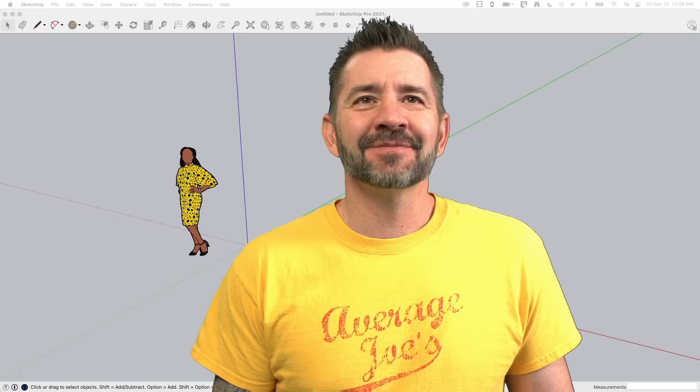Uh-oh, you covered me up. Yeah. See? Working out bugs, didn't realize I can do that. I'm gonna have to stare over to the left. That's right, you turn your head. I'm sorry, I'll try to fix that next time.

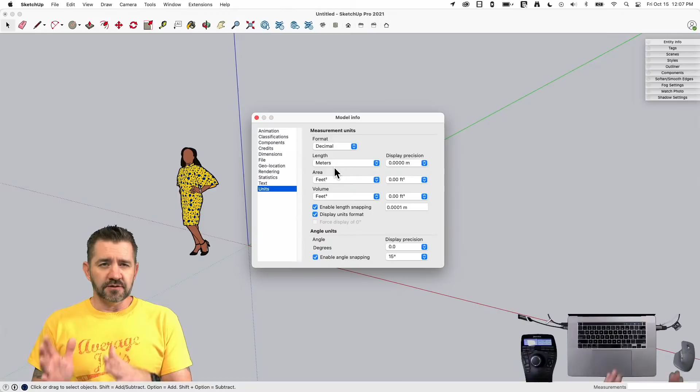All right, so here we are in SketchUp. First thing I'm going to do is go to my model info and change my units. I'm going to change from inches to meters. The drawings themselves are going to be in millimeters, which is pretty standard for something that gets machined. I'm going to model everything in meters with the millimeter value, so I don't run into the small face issue inside of SketchUp.

Just to let everybody know, SketchUp was created based on the thought that it would be used for architectural purposes, so it was never designed to work with very small faces very well. By bumping it up to meters from millimeters, we're going to use the same dimensions we see on the page, but model it, what, 100 times bigger, 1,000 times bigger?

I don't know. Why not both? We could rescale it down. 1,000 times bigger, oh how about that? That'll break things in a different direction. Too big. So that's what we're going to do, we're going to work with it like that.

Dave wants to know if he's got permission to show what he's already done. Of course, Dave, post away. Yeah, go for it. I think somebody else, Andy, was also starting to post some stuff too. He was running into some missing dimensions, which I thought was exciting. I haven't looked at the drawings that much, so I don't know what we have and what we don't have.

I'm looking at these drawings and I can't help but think part number 4 is basically just the SketchUp logo. Isn't that funny? So we're going to start with this one, part number 1. There is no significance to these numbers or values, I just put names on them in the order I thought would be good for a warm up, and we'd work our way up. That's everything going on here, so don't look for any more meaning than that.

Okay, so here we have it, this is the thing. I imported this as an image, threw it on the ground, and did not scale it. I'm not looking to actually trace and draw these things to scale. The whole point of this practice is to use these dimensions to make these drawings. So I'm intentionally not scaling it, this is probably not 54 meters. Let's see, no, it's 1.4. Ooh, this is a little too big.

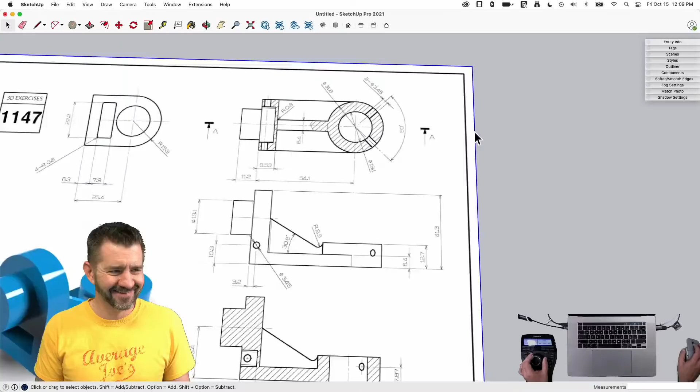Dave and Andy both said they can barely hear me. I don't know if I turned my face away, but if there's knobs, let me turn them. Yeah, turn that knob, the one with the green cable. Turn that one to the right some more. 11? Is 11 okay? Let's see how it goes. You might just have to get up on it and get more friendly with it. Come on up in here, because somebody was using it right.

All right, we're going to hop in here and start drawing this thing. As I'm looking at this, I'm thinking this would actually be a great way for people, if you happen to be in the beta for the iPad version, to start practicing your iPad version of SketchUp.

Absolutely, I'm going to switch this over to millimeters and try to model it and see what happens, see if we're closer this way. Learning opportunity.

So it's going to be way smaller now. Where's 54 at? Oh geez, 54 is going to be teeny. Oh boy, just have to really, really get on there. Typing a lot. All right, so, yeah, I'm trying to figure out how we'd bring this back down to a more realistic size, and then we'll try to draw on top of that. We'll play with dimensions as we go through here, and if we need to make changes, we'll make changes.

All right, so right here I'm going to start by drawing the footprint of this piece, and then we'll come up. So this piece is, what's the overall width of this right here? This would be the one dimension I don't have, right? Okay, but we have this. Am I just not seeing it?

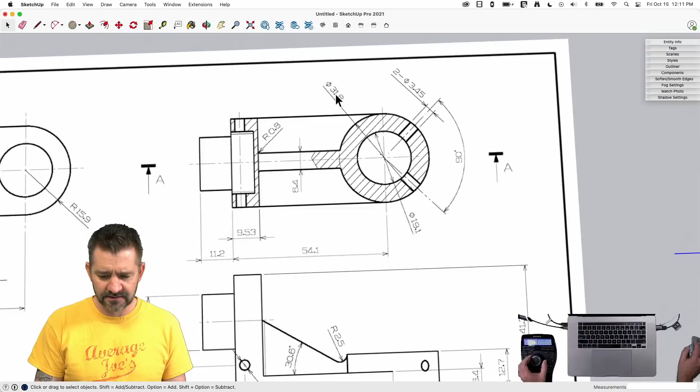All right, so I know that this dimension right here is 54.1, so that's the first piece, that's this line right here. Then we go up. Oh, here we go, here's a radius of 31. Is this a radius? No, it's a diameter, so it's 31.8. That'll get us our original 31, or initial rectangle.

And I know I didn't use the rectangle tool. I think it's because my brain accepts those dimensions one piece at a time, so it's easier for me to do it that way. I know some people want to know why I don't use the rectangle tool right off - it's just habit, I guess.

All right, I'm gonna draw a circle. I'm gonna use 24 sides for all of my circles, and I'm gonna start at the center of this line, pull up to here. That was a different center. Yeah, that first one was not right. There we go. All right, so then I have that.

Now, since this hole goes all the way through, I'm going to put this as part of my footprint. I'm going to come in here with a circle, grab the middle, and pull that out the same direction on the red axis. See, I'm going the same direction as I pulled out. Well, actually, the first one I pulled out green. It'll be the same. And that is... see that it's posted - it just shows you the thickness of the wall.

So right here, 19.1, is it? Oh yeah, and here's our math shortcut for those who are like me. I can type 19.1 halves - no wait, that won't work. I'm gonna have to do math.

Yeah, that was one of the first things Dave said, was there's going to be lots of math in today. Dang it, how can I cheat this? Hold on, no I can't. Okay, here's what I'm gonna do. I'm gonna draw a line right here that is 19.1. I'm gonna grab that line, move it middle point to a middle point, and then draw a circle up.

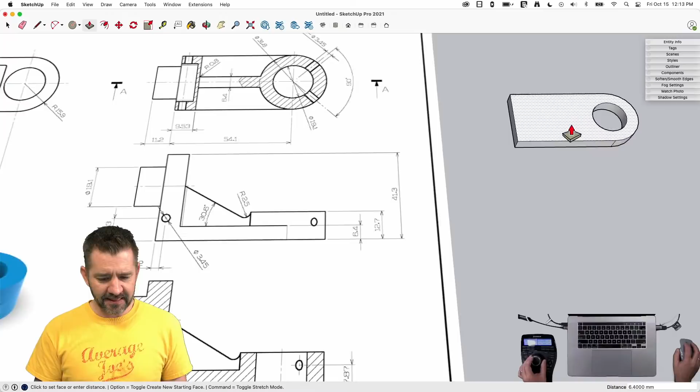Yes, inferencing mathed. All right, I'm gonna pull that up right here, 6.4, 6.4. And then this circle goes up 12.7. So I'm gonna, a couple ways I could do this.

I could come in with a circle, go to the middle point right here, pull that up. You forgot to turn on your screen, your keylogger. Oh nuts, let's see if I can - shortcut key sometimes works. There we go, boom. So that would be an option.

The other thing I could do is grab this arc and inference to the center here, and option copy that around 180 degrees. That works as well. All right, then that needs to go up.

More mathing here. I'm just going to draw a line, come over here like this. Maybe this is my goal today, is to not do any math. 12.7, and then I can just inference that up to that point, and then option smooth that line. That gets me this piece. So now I have this.

This part right here is going to come up, and I can use this right here - this is a good spot to see that. So this comes up to the center of the circle is 25.4, so I'm going to start right here. 25.4, that's the height. The thickness is right here, 9.53.

So I'm just going to grab this line right here and move it - option 9.53. That's, of course, the Mac shortcut for copy. On Windows, it would be Control.

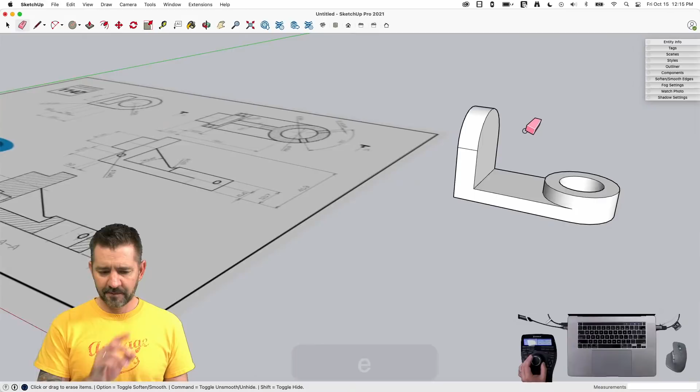So Bill points out that if you're modeling it 10 times, you wouldn't have to worry about that decimal. Right? Yeah, but I would screw that up. Sometimes it wouldn't be, no question about it. I'd be redoing dimensions constantly because I would forget.

So yeah, doing one-to-one, not gonna worry about it. All right, so I'm gonna come over here, and this is nice enough to have a radius, so I can just type in this 15.9. Oh, that's the outer. Oops, son of a gun.

I don't know that that's... oh, right here. 19.1. Sounds familiar, deja vu all over again. Here, just undo it. Wonder if I can get tricky right here. Let's do this, this would be fun.

I'm going to copy this, rotate it, grab it by the center, move that center to this center, and then pull that out. All inferencing all the time, boom, like there's no tomorrow. 11.2, didn't even have to draw anything for that one.

It's sort of like a Lego kit, you just kind of grab pieces and stick them together. That's right, less thinking, more doing. That's how I like to do it. That's my precision modeling tactic, just don't think so much.

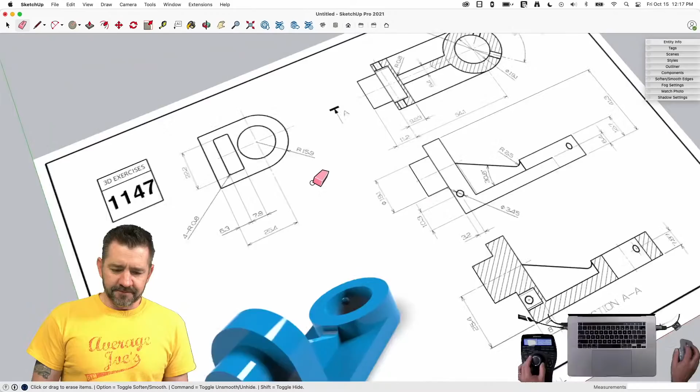All right, we have a little hole right here, so there's this 22.2 by 7.9 opening. So let's do this. Let's take this line 6.3 up. So I'm going to grab this option, move that vertically, 6.3, enter, and then it is 7.9 tall.

Whoa! Move that up, 7.9, and then it is 22.2 wide. So that means if I come to the very center, I'm going this way, 11.1. Sorry, I did that math in my head. I just had to show you that I can do that, especially when it's very even numbers like 2 divided by 2, I can nail that all day long.

Oh, that's coming, I'm sure. All right, so I'm going to grab those, and then that pushes in not all the way through, but 8. So grab that, push it in 8, and then delete that line.

So work on this piece is coming along. I got a couple holes in here, some down here, and some into the circle. We'll do that with solid tools, it's the easiest way. This hole right here is easy enough to punch through, we could do that one now. This one where I have holes coming into a rounded surface is definitely going to be easier with solid tools. Using solid tools means getting this to a solid state and making it a group first, and then coming in and putting the holes in.

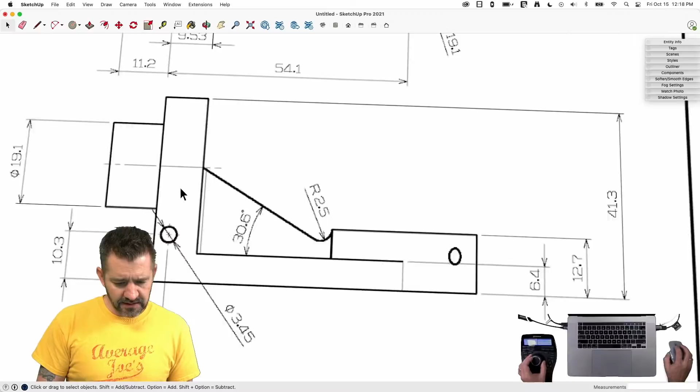The one thing I'm not 100% sure about right here is this guy. So it looks like he's at the center, or she, they are at this - I'm not gonna be able to say it. Go pull that up to the middle of this circle. Actually, I guess I could pull it up, oh, I just pull it up to here, right wherever this line ends. That's the same height as the center of this, which it looks like is where that's supposed to be. And then, see, it has a rotation of 30.6 from the flat.

So here's what I will do for that. Actually, I probably wouldn't even do it there, I'd probably go like this. Draw it right here, grab that, rotate it, 30.6, and I'm going to grab that and drop it right here. Now I can just take that line, continue it all the way, just run it right through. All right, there we go.

So that is kind of what we're doing. Actually, I'm going to drop that down, get me a plane right there. All right, so that is not done though, because we do have a 2.5 radius arc right here. So maybe I'll go like this to give myself a work surface there, and then I can draw an arc here to here, then pull it down.

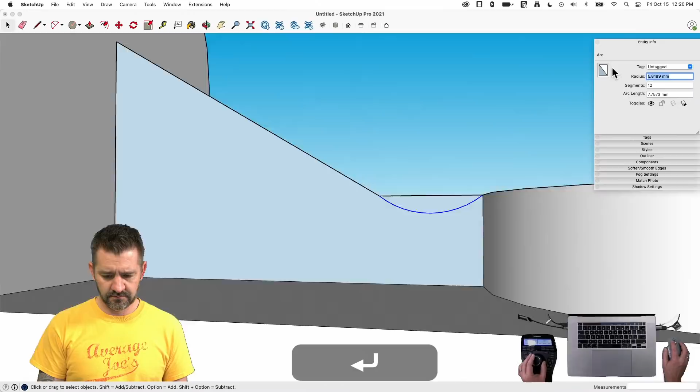How would I do this? So it's a 5 diameter. So if I just draw it, then select it, and then come here and say 2 point. It didn't work. 2.5. It didn't like that.

Make a copy. 2.5, I will come at you. All right, what? All right, let me put this back. So, like, I would probably make a... I feel like something's not right. A 5mm circle, okay, just sort of - all right, let's do that.

Wedge it in again, so we'll make that, take that, option, copy it over here. Something like that, doesn't quite meet up, but it gets us close. So if that was correct, then we could do some erasing, and it would get something like that. Doesn't look right. Dave's probably telling me in the chat why I'm doing this wrong.

No, but Andy did say he had fun with this part. Okay, well, hey, that does not - I would consider that fun. No, it's not too far off.

All right, so the width of this is 6.4. So I'm going to go ahead and grab it here, 3.2. And then did that get you? Oh, whoa, here it is. There's a thing. All right, just when you thought you were just about done, pump the brakes, buddy.

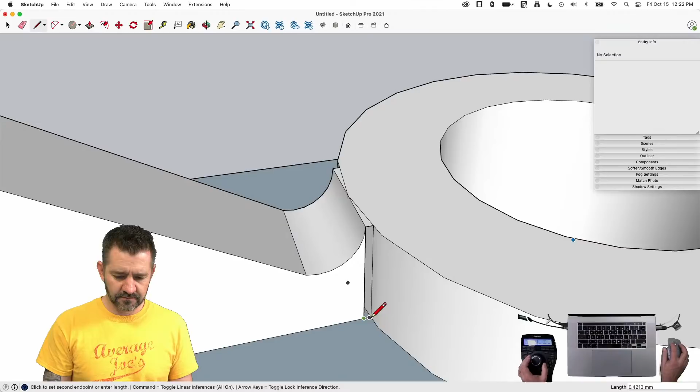So there's two ways this could meet up, obviously. This arc could actually eat into the circle, right? So this could - I have it meeting here at the tip, but it could meet in at the edges, which would give me a little bit more of a swing down here. And that might be why - might be why I feel a little off today.

Let's see, what does this look like from the top? Yeah, see, this goes all the way through. So that arc actually goes to right here and not... oh, tricky, tricky, tricky. All right, I'm going to go ahead and go like that. Delete this.

I'm going to make this a group, and I will pull that back to here, and then I will explode it. I made it a group because SketchUp is always going to try to keep geometry connected. So if I moved it without making a group, it would have stretched everything over. By making it a group, I temporarily isolate the geometry and then pull it over.

And then I should... let's see.

They said this method would be harder to machine.

Yeah, but some commenter who I won't mention already told me I do a bad job at that. So you're just leaning into your flaws. I'm going to do it as wrong as possible. That's right, I'll show you poor quality. No, I'm just kidding, no you won't. That's right, all right, yeah.

So that probably would have made more sense to go back and do that a little differently. But hey, we're matching the drawing more or less, so I got that going on. All right.

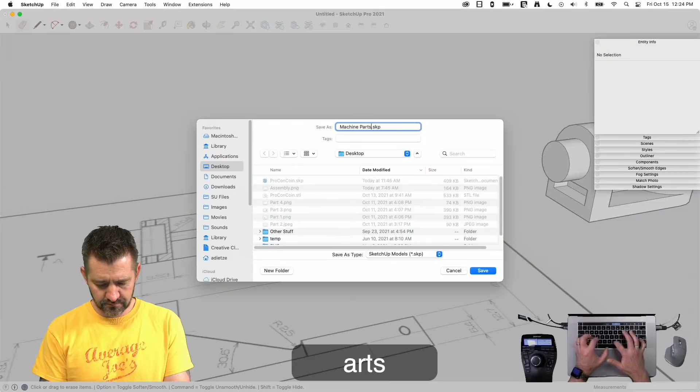I have other jobs called machine parts, I'm sure, so threw a date on there.

All right, last bit is going to be some holes. These holes, like I said, are simple, right? Because we got a 3.2 in, 10.3 up. So if I go... or I forgot the number they said, 3.2.

Not only does he suck at math, he also can't remember a number for 10 seconds. Up 10.3.

Actually, I think it has more to do with self-doubt than anything else. I'm worried that I'm mixing up a number. There's a lot of numbers here.

All right, so I have an outer diameter of 3.45. So if I didn't want to do math, again, I come here, 3.45, grab that right there.

Get rid of these extra lines. And then what I'll do here is I'll pull it not just to here, but I'm going to pull it all the way through like this. See, that gives me a hole through both sides, but it doesn't break the interior wall here.

So if I grab this right here, I say intersect face with model, that'll break it right there. I can grab this tube and delete it, and then get rid of this and get rid of this. All right, so that's that piece done.

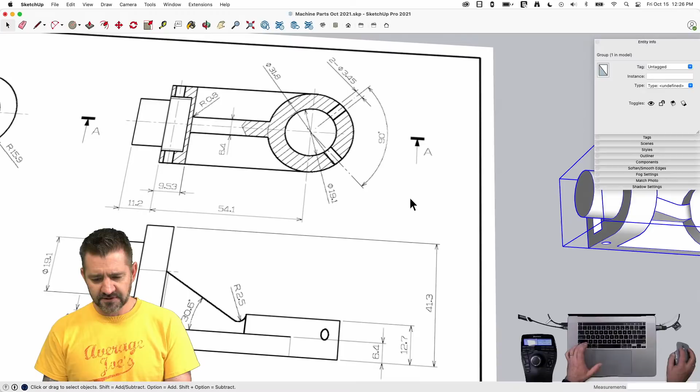3.45. Andy pointed out that little notch that plugs into the end beneath the round peg, it's got rounded corners. You can kind of see it when you're looking from the top down too. Oh, is that what that is? Oh yeah, look at that. 0.8 radius, all right, we will add that.

I'm going to grab this, make it a group, rotate it like this. Now I'm going to grab it by that center point, very intentional, and I'm going to line it with there's a center point, and now I'm going to move it back.

All right, so that puts the middle point of this circle in the middle of this circle here. Now I got to drop it down because it is 7.87 off the bottom, so I'll just come over here and 7.87, and move this from, again, the center of the circle vertically to right there.

Now they are, so off the center, 90 degrees apart, 45 this way, 45 this way. So I'll take this one and I will, again, off the center, rotate this 45 -- arrow shortcut, super handy there. Oh yes, and then this will go this way, option copy, 90 degrees.

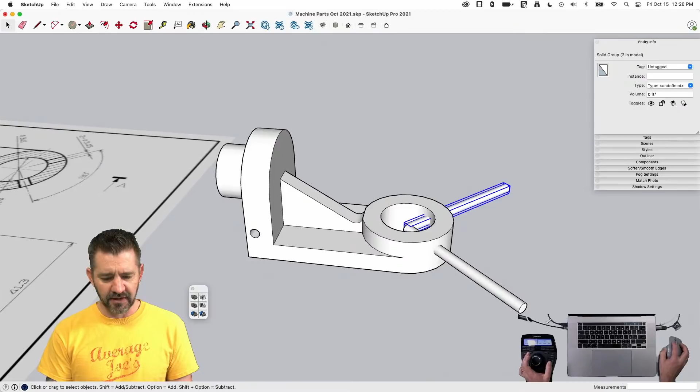And there's my two solids to subtract. So now I just go into solid tools, which is probably a tool set I should just keep on because I tend to use it a lot with machine parts. I'll select it and I'm going to subtract from -- oops, this guy's not solid for some reason.

Let's run solid inspector. I know I'm cheating, I am actually using an extension, but it's a free extension that everybody should have on their machines, and it's part of web, so is it really an extension anymore? All right, so take this, subtract that from here, and take this and subtract that from here.

Dave said he did the same process, but he did the drill holes -- the drill bits, I guess -- made them in place. I wonder how much more frustrating that'd be.

Or less. Also, everybody's asking about guidelines. Yeah, I've heard of those, seen them around. I'm terrible at using guides, I just don't ever use it, I just use geometry, I don't know. There's this thing in my brain that tells me it's an extra step, so I don't do it. Yeah, because what you did was so efficient with no extra steps.

I think I say that jokingly. Obviously, they're great tools to have. I just don't ever use them. No, I don't ever.

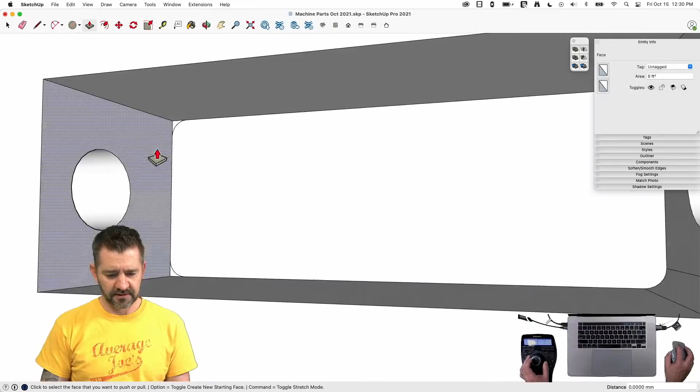What's up now? Can't talk and think. There we go, get that one in, and then I can double click. Double click, double click, oop, missed it. And then I can just do a quick push pull to pull that out. Double click, double click, and then some cleanup, a little erasing. And then what I probably would do is just do a triple click to select everything, and then soften and smooth to get rid of any extra lines. And that would be part one.

All right, I feel warm. That was 20 minutes, it's a little longer than I wanted it to be, but...

Let's go ahead and scoot you over, you go hang out by Sumele's foot. All right, I'm going to save, and I got to keep blasting through. I want to get to that assembly, the last one I have is an assembly, so I want to make sure that we get to that one.

So let's see, part number 2 is right here. All right, this is the one that Andy was saying he thinks is missing some dimensions. I say he's thinks, I believe it. I'm not saying that you're wrong, Andy, but I think we can work it out if we work together as a team. Right now, what we're going to do is actually find that missing dimension. That's right, or not find it, because it's not there. They said I'm still really hard to hear, so I'm thinking this microphone must not be...

It is our podcasting mic, so you really have to get up and actually touch your face to it. It's clean-ish. I don't know if I believe you. I don't know. That's fair, I'll try it. All right, give it a shot.

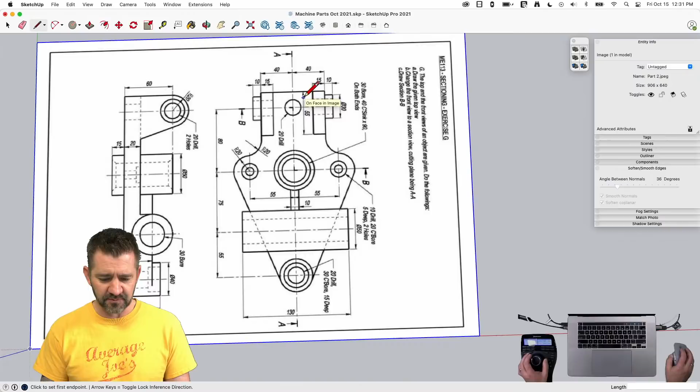Oh, is the dimension that's missing this one here on the end? I'm trying to find an overall dimension for this. This is a half, so I think my mindset would be to model half of it because all these pieces repeat on both sides, so I'll probably model half of it. So I think you should be able to use the radius of that outermost curve to figure out the overall length.

Right, so that'll work this one. But what about here, on the other side? Oh no, look to the left, move your cursor to the left. Yeah, there, here, how about that? You got 3 different marks there.

With radiuses, so hold on. So first I got this line, it's 80, right? Start with 80, that's the first piece, that's right there. I got another one coming down here, 75. And I got another one, 55. So that's these 3 dimensions. This...

Why they got to be rude like that? Okay, here we go, 40. So it's a 20, right? Half of that is 20. I just want to celebrate the fact that these are all whole numbers.

There's no decimal points, how rude was that for a sample drawing? That was not a real thing, why the hell did I put that? Thanks for pointing that out, now I'm irritated. This is radius of 20, so another 20. So in theory, this is now the full dimension.

So if I go like this, and like this dimension, that... 250 millimeters. You guys who did this before can tell me if that was right. And see, I did that without doing math. I'm just saying, got away with it.

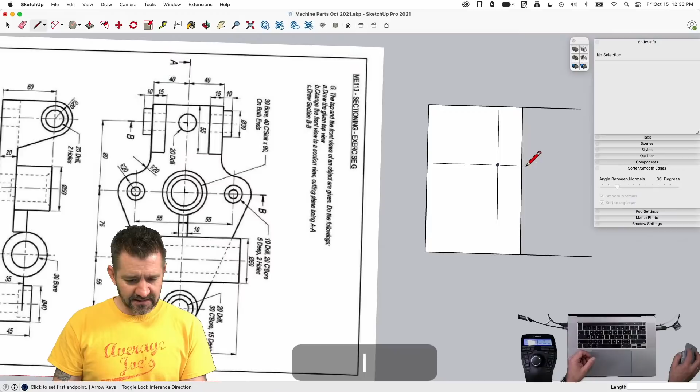Guides, in the business. So I'm going to take this line, which is right there. This comes over 55. And then I'm going to put a circle where that is, right there.

So my outer diameter is 20. I'm going to go this way, 20, enter. All right, so that gives me that, and then I have a radius of 20 here, which should just be an arc, because this is a 20 radius also, that's a 20 radius from here up to here. Awesome, so that gets me all of that.

All right, now down here, this guy right here is 40 also, so up 20, that's this line right here. I can just do a circle, pull that down like that. It gets me to that.

And then this is where I have a tangent line going from here to here. True tangents are tricky in SketchUp because you have to use an extension to figure true tangents. So I am totally cutting the corner on this, no pun intended, and that is only part of it. That's not ideal, I admit, but it gets me that piece. There is, I think it's called true tangent extension, that will figure that out for you, but I am not using that.

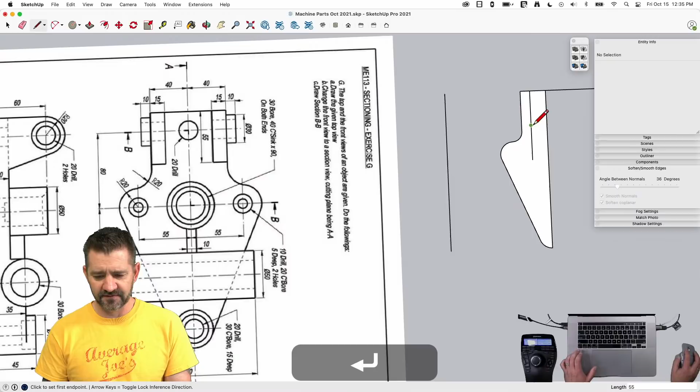All right, I'm going to put this little riser right here. If I come here, go this way 15, drag that down like that, and then come here, come down 55. I guess I could have drawn that down 55 instead of running it long. I got excited.

Especially since you're so precise with your not wasting steps. I also should have done that first as well. Let me do a little cleanup here.

All right, now this piece right here, so that's, I just pulled that up 20. This to the circle is 60, so that's another 40. Pull that up, 40. Let me get rid of some lines here.

Is it part number 2 or part number 4? You jumped ahead, that's okay. Yeah, carry on, like I said those numbers are just the order in which I downloaded them.

So, all right, so this is a radius of 20 as well. I'm going to go ahead and grab a circle, put this in the middle, and pull it out 20. It doesn't go all the way through.

And then I'm going to take it and scoot it over to here because this, maybe this. There we go, I like that better. That is where that is. There we go. Boom. That gives us that leg.

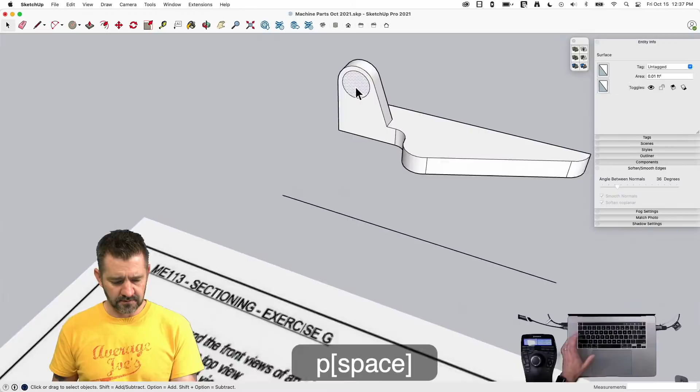There we go. Max is curious if there's a reason for your default number of segments. 24 is evenly divisible by 2, 3, 4, and 6, so I'd imagine something like that. I don't know, that's been that way since well before I used SketchUp, so I can't really say what the reason is, but it doesn't get too heavy. That's like 60 would get you there as well, right? Yeah, it's a nice light number compared to a lot of times.

So when I just model stuff for modeling in SketchUp, I use 24 for that reason specifically because it's real easy to divide - you can draw a clock using it because it's evenly divisible by 12 even. If I'm going to go bigger, like 3D printing something, I'll usually go to 96, and 96 is also in that evenly divisible range. I don't know what you'd call that, but yeah.

I'm going to take a quick break and smooth some things. Oh, yeah.

All right, so that gets me to here. I have a couple more pieces, so I'm not going to put the circles in the middle yet. I'll put the circles in the middle after we join the whole thing together, the two halves. But I'll put this circle in here, and then I'll put this chunk right up here on there, and then we'll join it together, and then I'll come back in and drop my middle circles in.

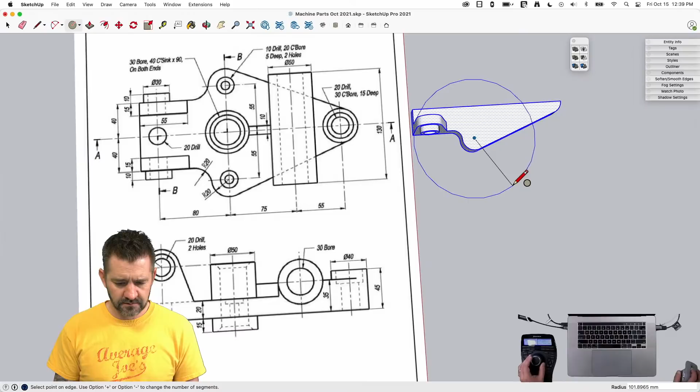All right, so question now is, okay, so I can inference the center, perfect. So I'll grab a circle right here. Oh, these are counterbored, these circles are - here we go.

10 drill, so go 10. And then it looks like it's telling me to go 5 deep. And then another circle from the center of that, which is 10, which goes all the way through. And speaking of inferencing, I inferred all that - I don't know what these words actually mean. I got a big circle, a smaller circle, one drops down. So that's what I got out of that. So forgive me if I'm incorrect.

All right, now we got this thing happening. So I'm going to create this original geometry, actually not from the outside like it's showing, but I'm going to model it from this side because I have this nice flat face to work off of. So that's what I'm going to do.

So this is 55 off of the center point of this arc. So if I come here, come this way, 55 gets me there. Drop a line to reference that. And that point is 35 off of the ground. So down here, go up 35. And they're at that circle.

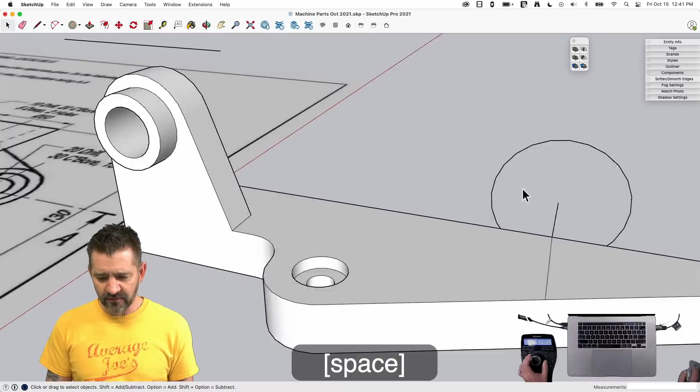All right, so now this is what I was talking about when I was talking about using a circle with those edges. As long as I draw on the axes, so as I drew that vertical, as long as I'm on the red, green, or blue axes, then I know that I have a point right here that I can drop down, a point right here that I can drop down. Not sure why it's not closing. Let's just force that. And that gives me that face like that, which is what I got right here.

Now so that is going to come across. I wonder how that's supposed to - oh no, so it'll go like this. So I'm going to take this out. Actually, I'm just going to run it long right now. We're going to come back and trim that back in a second. From here forward, this comes up to here. See that right there? It goes up high. So just pull that up now.

And then let's get this full circle on here. For this side, again, find the center. I'll just pull it straight up. There we go. And I'm just going to, for right now, I'm going to push this back to where it meets there. Push that back as far as it can go. And then we'll also have to pull this back to, I'm running it right through there. That's good stuff. That'll work.

All right, so I kind of created a little bit of a mess right here. You see, I got stuff overlapping here. I got these pieces jutting out. A little messy. So we're going to clean that up. I'll start by selecting this, saying Intersect Face with Model. That'll give me an edge right there. Go ahead and clean these guys up too. Actually, I guess I delete that one and just clean up that one.

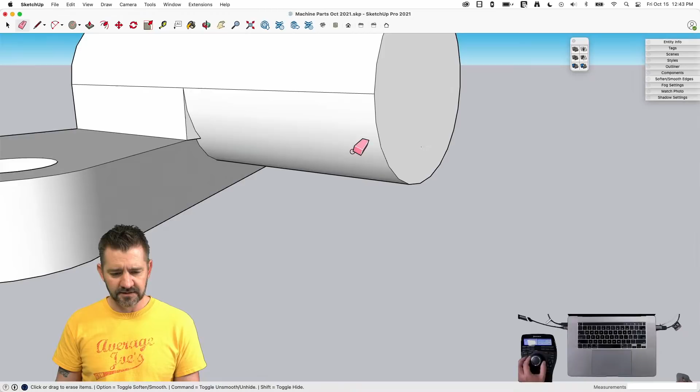Now this, I'm assuming, if I look at the face here, this face just continues straight through. See that? So what I want to do is have this face come through and cut these chunks off. I'm going to do that by coming right here - or actually, it doesn't really matter where I go. I can go here, pull a line straight up. Right here, pull a line straight up. And connect those two. And then I'll grab this point. And actually, we'll drop down. There we go.

All right, now probably could have put that in a group before. Actually, let me do that a different way. Let me right-click, and with nothing selected - I don't do this often enough because it's a newer command - I'm going to say make a group. That puts me in a brand new group that doesn't exist with anything else. Now I can use this geometry as a reference and draw a plane, a face in the plane of the edge of this part, like that. And that creates that. And because I'm in a group now, that geometry is separate from the main body.

So now I can come out here and I'll just grab the whole thing. And I'll say Intersect Face with Model. So that'll go in and break everything at this plane. Now I can just come in here and start - oh, that did not give me what I was expecting.

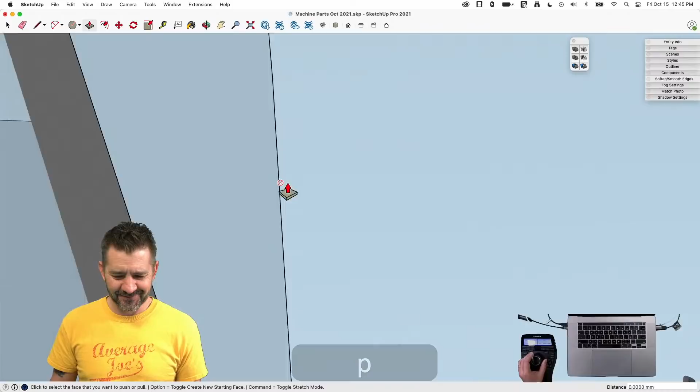Oh, that's why. Okay, undo. Let's do that one more time. I got to get this piece running through. So take this guy and pull that in over here. Opposite is true. Well, no, same thing though. Take that option, pull that through. There we go. And now I can take this Intersect Face with Model, delete that. And now if I delete this, there we go.

There's gonna be a lot of cleanup to do with this when I'm done. It runs all the way through. Same thing here, should be able to hit that one right there, and then just close that face. As soon as I do that, everything goes away. Get rid of these guys, get rid of this line on the top.

And I did, obviously, I ran that well long of where it needs to go. That's okay, because here I'll see what's that total length. 130? Oh, come on, man. 60. 65. That's right. I knew that.

There we go. And then I can just push that back to that inference point like that. All right. So...

One of the things that's going to happen, so I could have done that multiple different ways too. I could have actually modeled that circle as a totally separate piece and then run it back in instead of pulling it off of the original geometry. You can actually see how that could have helped a little bit.

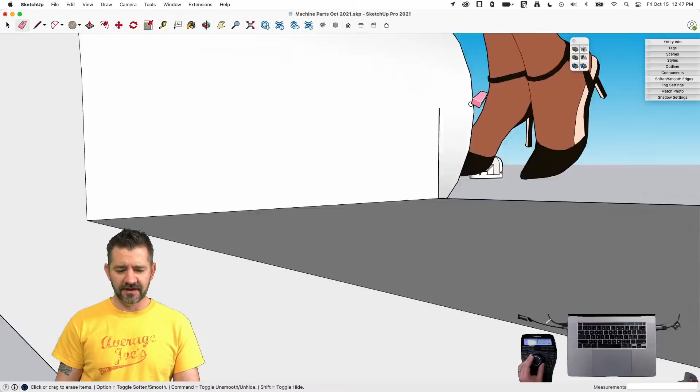But one of the things I do want to do now is I want to kind of poke my head inside and clean that up. So maybe I'll actually just select this and temporarily hide that surface. And I can just come in with an eraser, poke your head inside with this 3D mouse. It is, that's why. Try not to make that a requirement, but if you have to stick your head in a lot of your models, then a 3D mouse is a good thing to have. All right.

And then we can just go up to Edit, Unhide All, which will give me that face back. All right, last thing on here, I have a hole. Looks like a 15 diameter, so I'm just grabbing another circle, find the center, pull that over 15.

All right, I think that's everything now that is not part of the bigger piece, so I'm going to grab this, delete that. Grab all of that, option copied over here. I'm going to scale by -1 around the middle and then bring it back.

Right there. So one of the issues, of course, now is I do have to come in and weld it together by getting rid of the center line. Not a huge deal. Just have to make sure you hide the parts that are seams and erase the pieces that are cuts, like that.

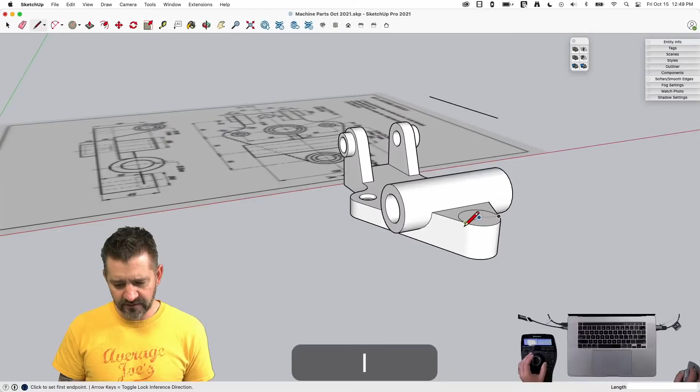Boom. Like that. All right, and that raises up 45. How far off the ground are we now? 35. I'm not counting that as doing math because that's simple. 45 minus 35. And I'm actually counting my toes, so you guys can't see that math.

All right, so when I did that, I got a broken thing right here. See that? So that's actually telling me when I did that initial circle, these lines broke. Not a big deal, you can always soften that. But if it's geometry you're going to inference again or use again, it might be good to weld it first.

So what I'm going to do is I'm going to come in here, double-click the circle, which highlights the edges all the way around, and then just right-click and say Weld Edges. And then when I do that, now I have a full circle. So when I pull that up 10, I don't have to clean it up.

Because I welded it though, you'll see that it did break it here. So I do have to come in and just erase those. That's what I mean, it's not a hard and fast rule, it's not gonna always break in that same spot, but I'd rather do that and have this continuous and have this all clean rather than have to go in and erase that stuff again.

All right, so I'm gonna come in here and I'm just gonna use offset this time. Offset that by 5. Should be 5 on either side, or 10 total. And that pushes down 15.

All right, and then inside of that, we have a 20. So actually, I'll just offset another 5, and pull that to the bottom, and that section is done.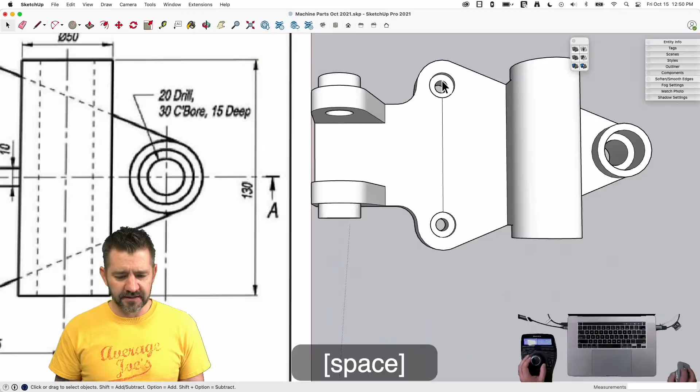All right, one last chunk here. So we actually have something that goes off the center line of these two circles. Because we're using segmented circles, it's real easy to grab the corner and just pull a line like that, which is going to be the middle there. So then I can come in here for this hole right here, go to the middle, pull that up 25.

Broken. It drew a face on my circles.

Quick cleanup. This circle right now, because it extends both above and below, I'm going to Option copy it straight down, so now I have that same circle on both sides. Make sure it's facing the right way. So this goes up to the center of this circle. It's like this example was made for inferencing. And then it comes down 15.

All right, so there's the outer geometry. Now we just have to come in and cut this. This is countersunk, so what we'll do is say the inner hole is 30, this is 40, so it's 10 again. So offset this 5, and then offset it another 5. And then take this piece and move it vertically another 5, which will give me a 90-degree countersink.

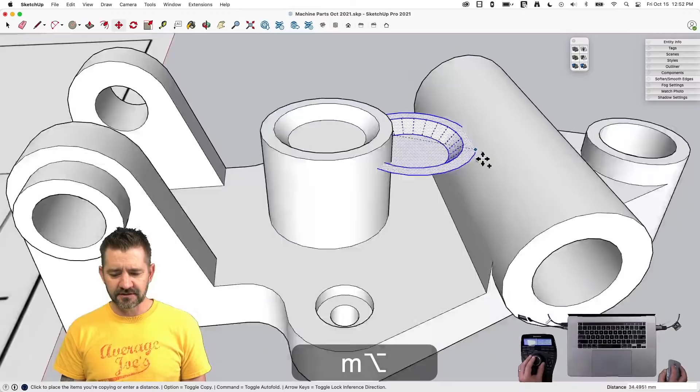I could do that again on the bottom, or I could copy this geometry, flip it 180 degrees, and then move it right here, and then just pull this up to here, and done.

That piece was fairly easy. They've observed that his dog does the same thing where he cocks his head to the side while he's working on something.

I've grown out of doing this when I try hard applications, so tongue stays in the mouth. I feel good about it. Head to one side works okay.

All right, I'm gonna save that. Oops, what did I? Command S? Oh, what was I hitting? I was showing hidden, my shortcut for show hidden. I don't know, Option S? Control S? How did I do that? I don't know. Something was happening there. There's a thing going on. Okay, what time is it?

That's something. All right, file, import. What if I do all three of these in 2 to 2.5 hours? Wait, you're missing a hole. And whoop, yeah, there's still one hole to do. Yep, between the two. Oh, back here. Yep. Okay, so you're not getting quicker, it's sloppier in fact. Was there a difference?

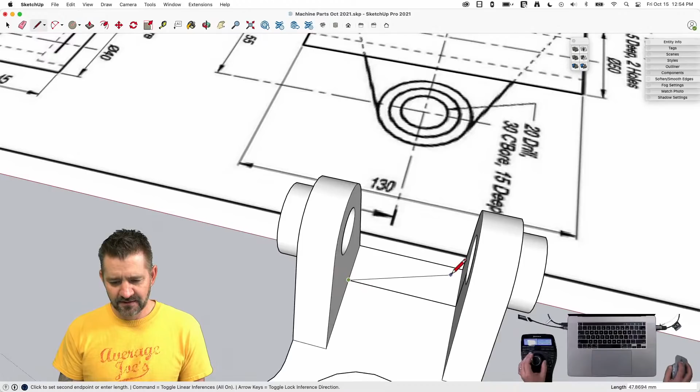All right, so I'm gonna go outside the group. I'm just gonna put lines in for reference, which I guess is just me fighting using actual reference lines. And then I come in here, 20 drill, so it's a 10 radius circle, and then pull that all the way down, and come out of here and get rid of those lines. All right, now I can delete that and move this over into the done pile.

Whew. All right, I think this next one's gonna be quick, he says, as the future chuckled at him.

All right, file, import. This is a drawing, kind of looks like it's like a cam bolt or something like that. Is that the term you'd use for this thing? I don't know, sort of. Robot head, maybe? That's all I'm seeing is robot head. Yeah, that's probably the accurate term.

All right, so what I would do with this, there's a couple ways to go about this. I'm going to start with a follow me to get this overall shape.

Steve said you were still missing a box between the vertical and horizontal. Oh, crap, I was. Undo. Okay, right here, there is. He's right, 10 wide. Look in here, how wide is this? That's not quite 10.

Okay, so right here in the middle, we'll go this way 5, go this way 10. And then I will pull that up till it hits. I'm out of, oh no, that's, why you no break? There we go.

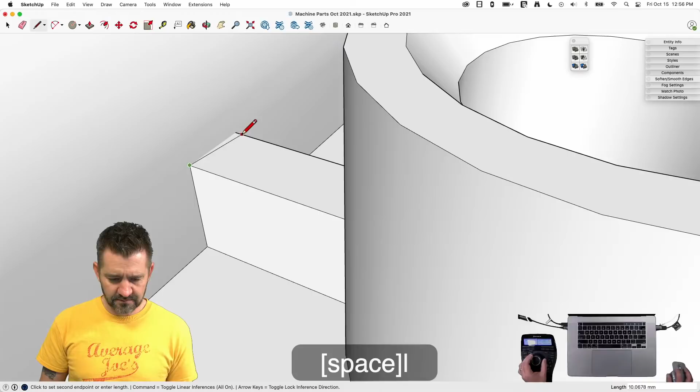And then there will be some cleanup to do on the inside. So same thing, I can come over here, hide this bottom piece, and then just pop in here, and well, that wasn't too bad. Oh, here's another piece from the merger, the big merger. All right, there we go.

Edit, unhide all. I do want to say too, I do like the hide command for that short-term hiding of individual pieces. If you're going to turn things on and off a lot, of course, you want to use tags to actually toggle things' visibility. But hide is a nice, quick command to get something out of the way. Or a lot of times in a situation like that, I'll delete the face and then draw it back in later.

Oh, no, what am I doing? Importing. Got distracted. Part 3.

All right. Can't mold a robot head. That's right, that's the one. Hey, look, that's exactly what it says at the bottom. All right, let's draw this profile.

So I'm going to draw half of this face. All right, so we go this way, 25. Wow, okay. This is way smaller than what's shown here. And then we're going to come up.

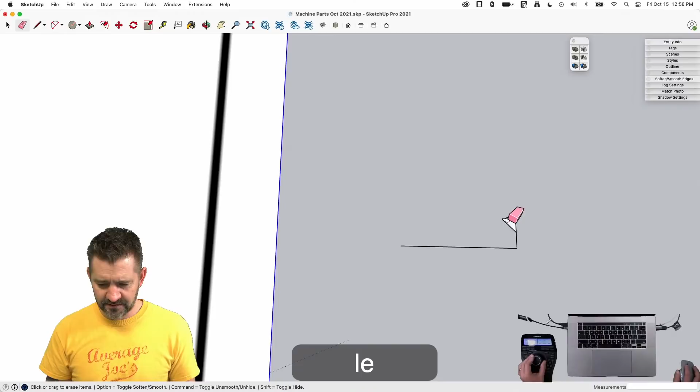Yeah, so this should be 3.5 down from here to here. Yep. Let's just get you over here, pal. All right, so from there we go up another 3. This comes out to here, and then - all right, so now I need an overall height.

So I'm going to grab this line. I'm going to move it, copy it up 50. Wait, you've got a chamfer you got to do there again. Yeah, but I got to get my overall dimensions in first, because then I come back and say - Steve said it's a 60-degree angle, not 45.

Well, I was just going off dimensions, because the difference between these two dimensions is 6, which makes it 3 here. Yeah, and then, oh no, I assumed that. I assumed. See what happens when you assume.

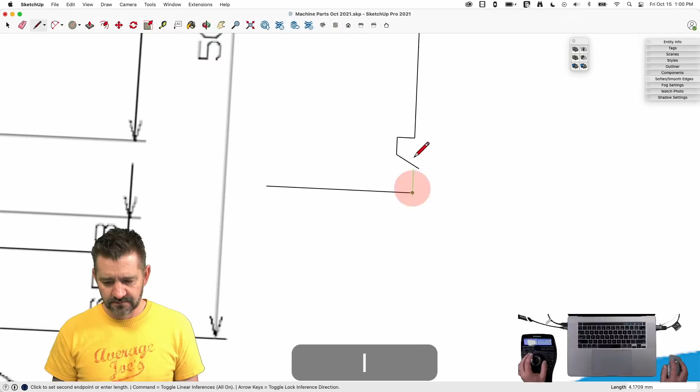Yeah, I do. All right, so I'm going to take that, and I'm going to rotate it 60 degrees, which is absolutely right. It is half of 120 degrees, which is 60, and that is the line I actually want. So what's the difference between 60 and 120 and 180? Math - that's the difference. All right, I'm going to take this one and I'm going to rotate it along the middle of this 3 millimeter piece, and boom, like that.

That gets me the mirrored chamfer right there. What's C2 mean? A chamfer of 2. Sure, maybe - sounds plausible. Or do I just take this right here and go...

C2? Oh no, that's 45 degrees of 2. So if I come right here, down 2, this way, 2, then that, I believe, is what that's showing. Yep, that looks right. All right, cool.

So now I'm going to take that like this. I'm going to grab a circle. There we go. Come off. I don't have to actually have this connect to the bottom, so I'm just going to come back out like this. Doesn't matter how big that circle is. I'll grab it.

Tools, follow me. All right, that gets us the main portion of our minifig head. Let's get it upright so we - all right, now we have lots of intersections to do with this piece.

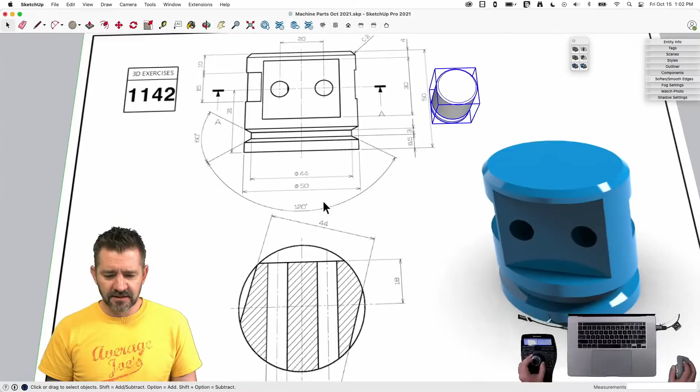So I'm just going to take this, make it a group, verify it is in fact solid. Pretty simple - follow me's, unless you have extra geometry floating around, are going to start off as solid. So that's pretty easy. Now, what we have is a chunk taken out of the front right here. We have these two chunks that are at an angle to the face or the front. And then we have two circles that go all the way through. So I'm going to make solids representing the pieces we want to take off, and then we'll just use solid tools to pull them away.

All right, so first thing we have is something that is 30 tall. So I'm going to come over here. I'm just going to go - I don't know, draw a line like that. And I'm going to come up 30. Run this way, 30.

Okay, let's see if I can find a hint on where this goes. It's 4 down from the top. So if I take this, bring it all the way up to the top, and now I move it down 4. This is at the right height now to cut in where it needs to.

The question now is, how far in does it cut? Right here, 18 off of the center. So if I come right here, draw a line up here, 18. Now if I take this block, slide it in this way to that point, that is the volume I want to cut out. So if I take this, hit subtract, that gives me my little robot face.

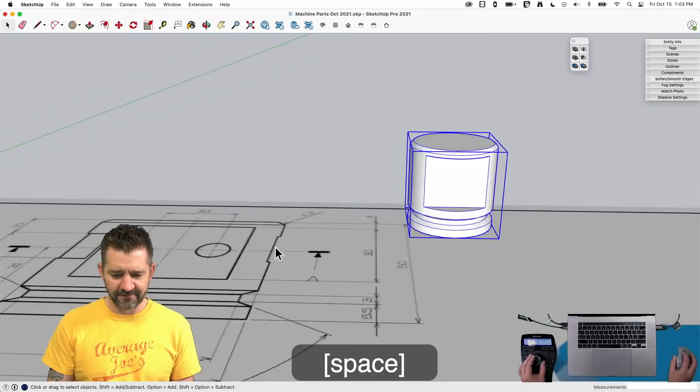It also gives me a surface on which to draw these two circles. That's very handy. Circles on circles is tricky business. It's very, very nice. Okay.

These circles are 31 off of the bottom and then 10 off this. So I could take this line and option copy this way 10, and then copy back this way 20. And now I just have to find 31 off the bottom. This is generally what I do. I don't have a face that's necessarily in line with this, so I'm just going to draw a line over here, up 31.

And now maybe I'll draw a line across like that. There we go. Now I can grab these two and I can move them vertically to that. And now that gives me my circle locations, which are 8. So I can go a circle right here of 4, circle right here of 4.

Get rid of all this extra stuff. So at this point I'm just drawing outside. This is still a group, this is just raw geometry. So I can just grab that, pull it all the way through, double click, and then grab all of that, make it a group, and subtract it from the body. And we got holes for the cam thing.

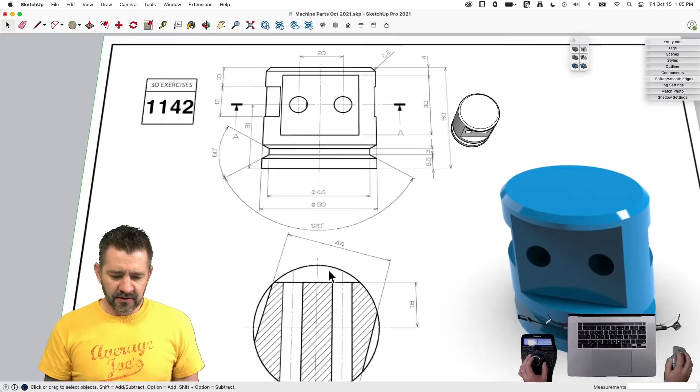Now this part's going to be a little trickier. So what I'm going to have here, I'm going to draw another solid. This is going to be kind of 2 boxes that will then align with this piece. I'm going to draw them off on the side first because I'll get confused if I don't. So I'm going to draw a line over 44 and then draw another line down. And I'm just going to give this whole thing some geometry.

So the important part right now is this center. The center of this line is how we want to pick this thing up and move it. The fact that these 2 legs are different size doesn't really matter. What matters is that I now make it 15 tall. Do that, 1, 5, enter. I'm going to grab all of that, make it a group.

All right, now I'm going to grab this and align it with the edge. So you can see these are little - it's just going to shave a little chunk off right there, is all. I'll go ahead and rotate it. Do I have a center point on the circle? Oh, it's not a circle, it's a follow me.

I'll draw a line like that, and then I will rotate it 15.

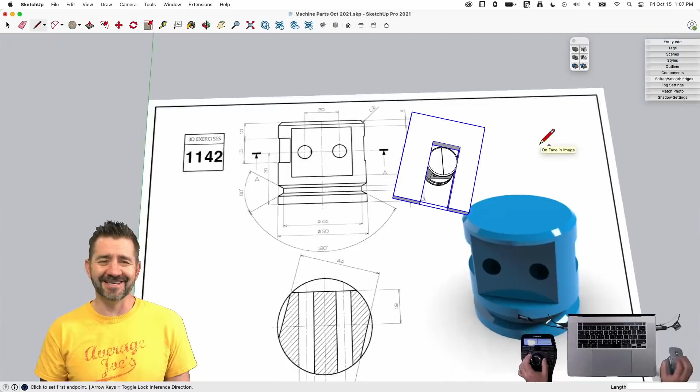Again, I know I'm a broken record here, but this is one of the nice things about using a 24-sided circle. I've been doing it so long that as soon as I see a circle like that, I look at it and I'm like, okay, this is the top, this is the bottom, this is the left corner, this is the right corner, and it's real easy to snap to those points. You always have the same number of chunks. If that was a 32-sided circle, I'd have to slow down a little bit and make sure I was snapping the right one. If it was 96, it's very difficult to get the right one quickly.

All right, so now I need to push this to the right spot. It's 10 down from the top to the top here. So I'll go ahead and grab this, move it vertically to here, and then move it down another 10.

And now, as long as this isn't touching here, I should be able to take this and subtract from there. And there we go.

And if you use Eneroth's Auto Weld, it leaves you with circles after using follow me and shapes. Ooh, I like that. That is a good one that I haven't used.

Wait a minute, backwards. Went the wrong way. I rotated it the wrong way. All right.

So that means I need my line back. Why would they do that? Why would they show me this face? It's backwards anyway, I mean it's looking... yeah, this face is over. Oh man, they had no respect for robot line of sight.

All right, so we rotated this way 30 degrees, right? Because we were 15 off. Yeah, okay, there we go.

Let's try this again. Get rid of that. Subtract from here. Wait, subtract from here. There we go. There's that little sliver right there, right here. And if it looks straight on, you can just see the indent over here. Perfect, nailed it. That's a fun little thingy.

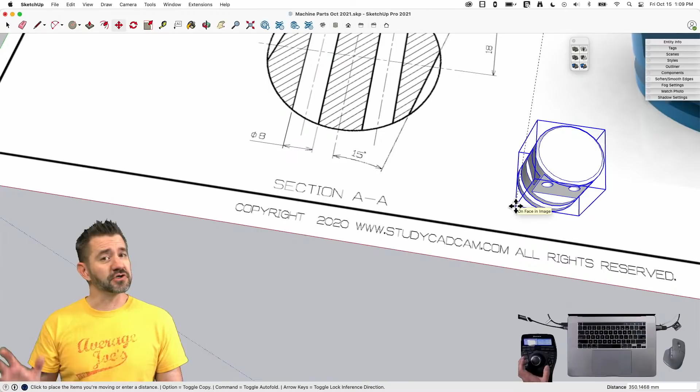I think this one's from studycadcam.com. If you guys are looking for some sample files, these are good ones. I found that there's not many of these that are perfect, but StudyCadCam has a ton. There's so many models there, and most of them are pretty good as far as the information goes. Every once in a while there'll be a missing dimension, but I always kind of see that as part of the practice, part of the challenge.

All right, see if I can do this next one in like 10 minutes. We have some time to do the assembly. The assembly is the last one. It's actually made up of like 6 or 8 different pieces that all go together. So I'm excited about that one.

Very few dimensions on this one, which I think is kind of cool. So it's not like left to right or top to bottom symmetrical, but it is 3 unique pieces. So all you really have to do is make...

Let's do it. Let's start with this piece, and then we'll kind of work - it should build itself out from there. I don't know, I'm making stuff up.

Let's see what happens. So we got a 60 by 60, I'm going to start with a rectangle. So if that is this face, outside radius is 20. So if I come here and just draw an arc right here, I can select that and say I want that to be 20. It'll go to the right distance there.

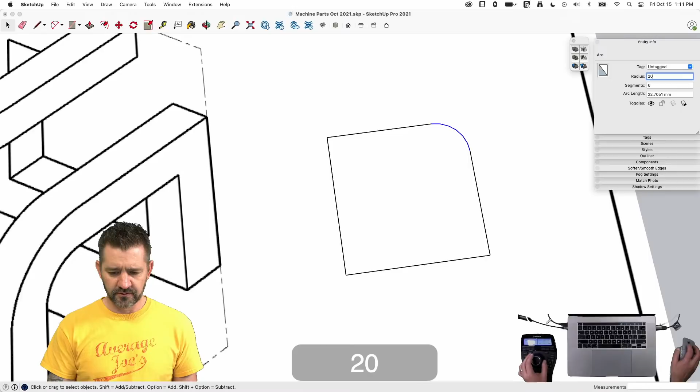It's 10, so if I grab that, this, and this, offset that 10, that gives me this piece right here. Then I also have...

I feel like I don't have enough information here, but we'll work it out. So I'll start by taking these, offset these 10 also. And now I feel like - so this connects back up, and then these get smaller. I feel like this shortens up by another 10.

And then that is, I'm assuming, 10 deep. I'm going to go ahead and soften and smooth that. And I'm going to grab that and make it a component.

Okay, so that is what I've done. Now to take that - let's say that's this piece right here. Assuming my dimensions are right, and that was 10 and 10, that means that if I was to draw a line 20 this way and then 20 this way, that this next piece would sit right here. That would give me this angle here.

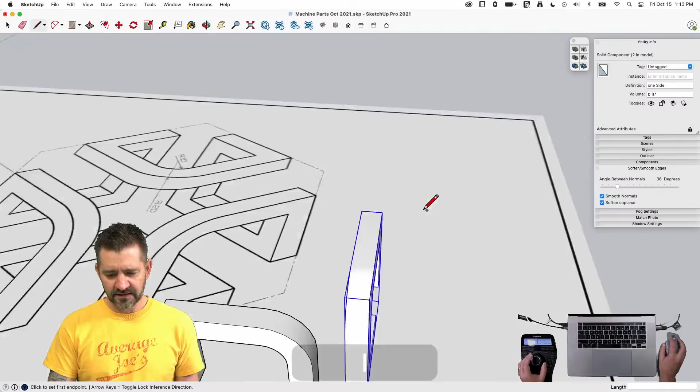Then we do the same thing here. I could go up 20 and go this way 20. And then I could grab this, put it right here, and then rotate that like that.

So you did this thing in 3 minutes. Well, yeah, I'm still assuming, so. Well, Dave thinks you've got a good, calibrated, good eye. All right, I'll take that.

All right, and I'll grab this side, and this side. No, stop clicking. Ever do that? Ever just get clicky? Yeah, I started double clicking and it turns out it's actually a quad click.

For me, I don't know what just happened. Autosave, auto close. Wow, was it? I hit the auto close shortcut key. Good thing it only took 3 minutes because you get to do it again.

Yeah, I don't know where that went. Excuse me. We call it a crash. I think that's fair. Wow, I guess it's good that I saved right then.

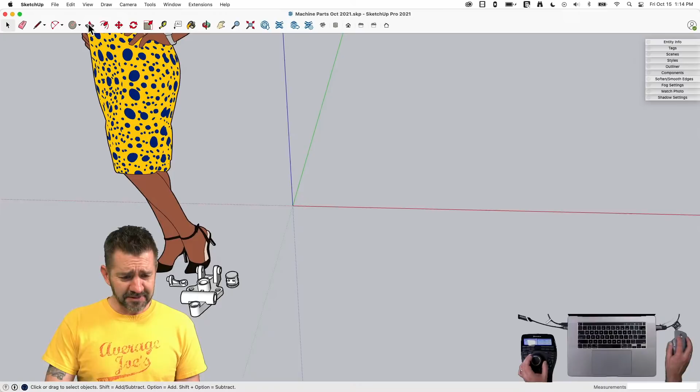Made me choke. All right, let's fly through that one more time. Excuse me. All right.

Okay, so got a rectangle, 60 by 60. An arc on here that is 20. I'm going to put it in and then set it to 20. And I'll just take the whole thing and offset it by 10.

And then here we'll go up 10. And here we'll go this way 10. Pull that up 10. Soften and smooth that.

I'll rotate that up. All right, so again, 20, 20. Grab this guy. So I was thinking about this too. I could take this - there's always multiple ways to do this. Option rotate, but then I do have to move it over like that, which I guess either way is probably 2 steps, so I don't know if it makes a big difference. Let's come up 20, come over 20, do the same thing. I'll rotate it. Option rotate a copy, drop that down like that.

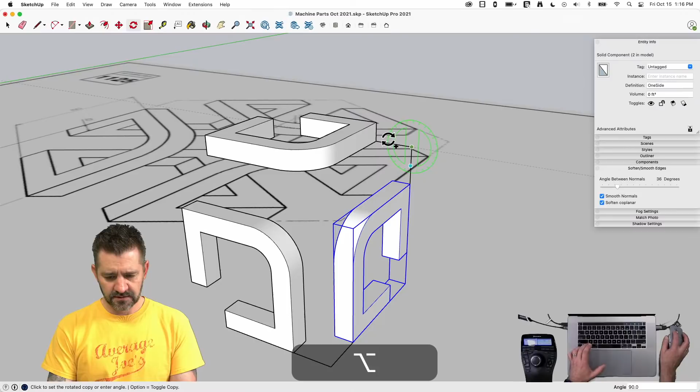All right, save before you do the next part. Command S. Whoa, oh it's because I'm in a race. Things are happening. All right.

Now let's get these back pieces on here. So again, I'm going to rectangle from here to here. I'm going to grab this side and this side, offset it 10. Erase this and this. Push pull this, 10.

All right, so now again, let's see if I can - if I draw a line middle to middle there, I should be able to rotate a copy 90 degrees. No, that doesn't work right either. That was further off, that was wrong. This gets you in the right orientation. It's something, yeah.

If I go from inside to inside, let's see what happens on this one. That's way further off. That was not the correct command. All right, put that there.

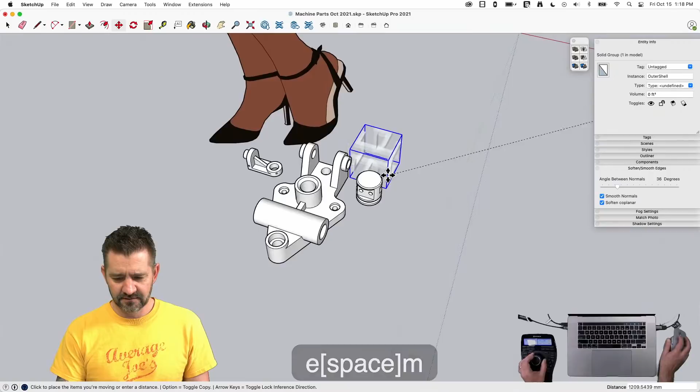That was a fun little exercise right there. Twice. Yeah, I think I learned something there. It's always easier the second time.

Awesome, all right, cool - assembly time. This is the one I've been most excited for.

We did - so one of the earlier machine parts, actually the thing that kicked off the machine parts, was I found some drawings online of miniature steam engines, like things you could machine yourselves from brass and copper and use copper pipe and that kind of stuff. Really cool little drawings. And we did that on a live model where we actually took those full drawings and modeled from scratch, which was really cool. But it's kind of what got this process started, is finding more of those drawings and kind of like quicker, easier ones. That was actually, I don't think the first one we did a steam engine, I don't think I finished it on air. I think I ran out of time after a couple hours. I had a few pieces missing, but it was a very cool one.

I thought we did. I thought you got it. Maybe, I think we've done two. We may have done two. Dave probably knows, because Dave was probably modeling them as I was and getting them done quicker and having them look nicer. Dave finished. Yeah, I'm sure he did. I think I ended up finishing it eventually. I just don't know if I finished it whilst live broadcasting.

All right, so here's what we got. So these are the pieces - 1, 2, 3, 4, 5, 6, 7 pieces all go together to make this one. Two of the things - pieces are the same. So sweet.

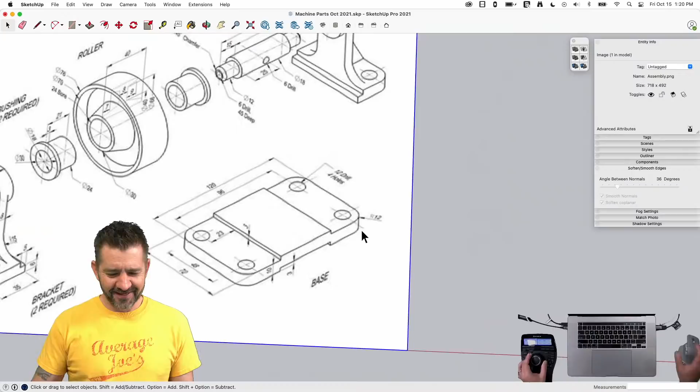All right, let's see if I can make this take as long as possible. No, I'm just kidding, all right. So here in this particular one, it will be a rare situation where I probably will use rectangle to start, because I have my dimension 72 by 120 right here. So I'll just grab rectangle - 72, 120. There we go.

It's really the radius, adding the corners, the curvy corners and things, is what slows the whole process down. It does, and it depends on the geometry we're working on, where it's getting put in, because that definitely can be time consuming to get them in there right.

It's nice when it's a situation like this, because I can come in - this is a radius of 12, so as long as I draw something that's on the magenta inference, like that, I can come back and select it and just tell it to, ooh, sometimes - oops, so close to 12. I didn't hear what you said, but both Bill and Andy said famous last words. I could change it to 12. It was very close to 12. I almost eyeballed 12 on accident.

And then I can just double click to place that. Place that. All right, with that, let's go ahead and we'll push that. Oh, actually, I'm gonna put my circles, my holes in here first.

Is that 12? 12 drill? It's neat how they made the font all hard to read. Yeah, they angled the font too, which I respect, but I can't read that. Oh, where's Colin with his photo optimization? Enhance. All right, so this 3 looks like it says 12 again.

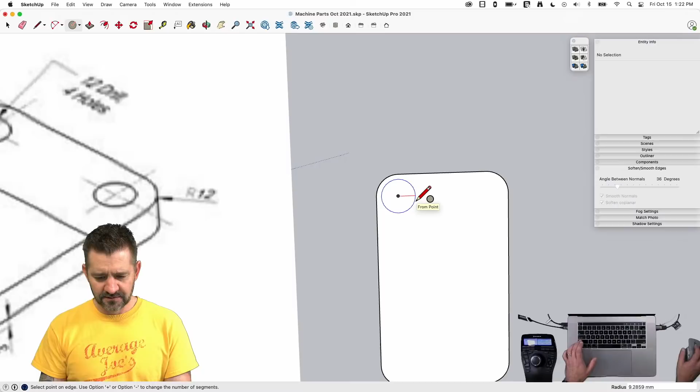All right, I'm just gonna grab both of these and bring them down from the corner option down to the corner. Delete, delete, delete, delete. I do that first because if I had done that afterwards, I would have had to push-pull each one down too.

What's quicker, what's easier, deleting those beforehand or push-pulling afterwards? Should have welded the perimeter before push-pulling down. That is true, he speaks the truth. That's what I should have did.

Three, that number's 3, I can tell from here. Yeah, I'm just trying to find out how wide it is though. Because it looks, oh, right there. So 23 off the bottom of the circle. See, this is the part that I find fun, trying to figure out where the dimensions are at.

Oh man, hold on, I'll show you guys what to do with that in a second. In this case I'm going to grab these 2 lines, just pull it over like that. Oh, made a bigger mess over there, I was trying to save myself work. Not what I did. Let's see if I go like this. That comes back. Do this one. That one came back too. So for whatever reason, well actually it may be because I redrew the face by drawing the last one in.

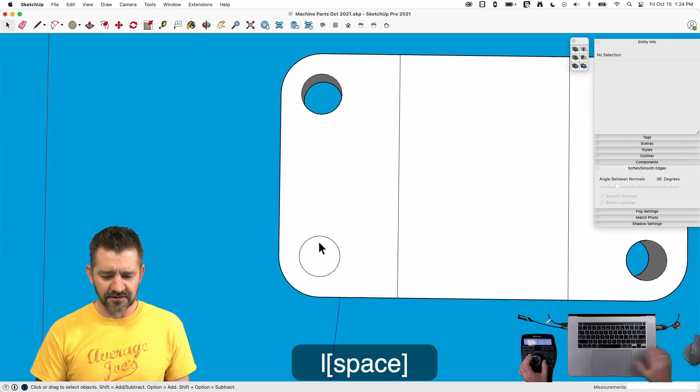I'd say every once in a while you get a hole like that and it won't heal itself. What I'll do in that situation, if I couldn't get this to come apart, rather than deleting the whole thing and starting over, I'll isolate the hole. So I'll do something like this. Now that puts that hole onto a separate face than the rest of it, and sometimes just doing that will fix it. So if you ever have geometry that's in plane but for whatever reason it's not cutting, putting a little line around it forces it to recalculate what that face is, and sometimes will fix the problem right away. In case that ever happens.

All right, that goes up 3. On this side though, oh did I have some cleanup? Cleanup. All right, on this side, this piece - oh, I did that wrong. The top is at 23.

I think that, is that supposed to be lined up? Here, let's - on the back edge it looks like it is, but on the front, yeah. It's one of those, what do you call them, optical delusions. The lack of any kind of measurement suggesting otherwise.

It's gonna win, yeah. All right, so we'll pull that up. Another blurry 3. All right, so make the component, I'm gonna call it the base. The piece on which all other pieces shall be built.

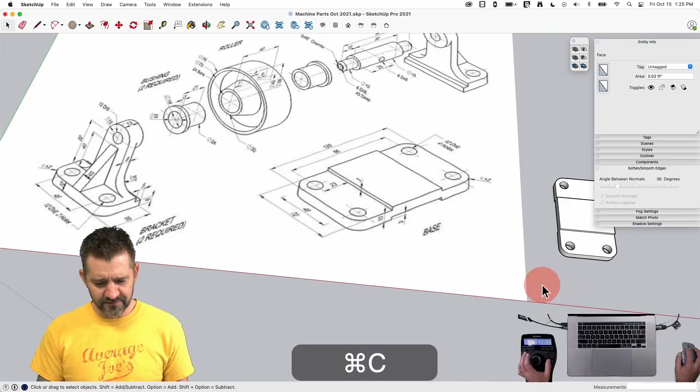All right, so here's the question. Can I save myself a little bit of work here? Can I cut a corner? Can I copy this, bring this over here? I think you can. Is this 35? Oh, it is. And is the center of circle 48? Ooh, wait, there, 48. Oh, look at that, and it's R12, which would make sense. Those pieces go together, it does make a lot of sense.

I guess I'm not used to things working that well or easy. There's still plenty of time to screw it up though, guys, don't worry.

All right, I'm gonna take that then, and I think this is a 6, so I'm gonna pull this up 6. Oh hey, I'm gonna use Jody's advice. Undo. I'm gonna grab this line and this arc, and this line and this arc and this line, and I'm going to weld them. And then I'm going to pull this up 6. Ooh, look at that, well good, could be its own exclamation like... sadist. Weld.

We'll bring that in 5. Then my overall height, I almost have to back it up so I can - up close it's even harder to see - is 10. So this comes up another 4. There's my base. Save.

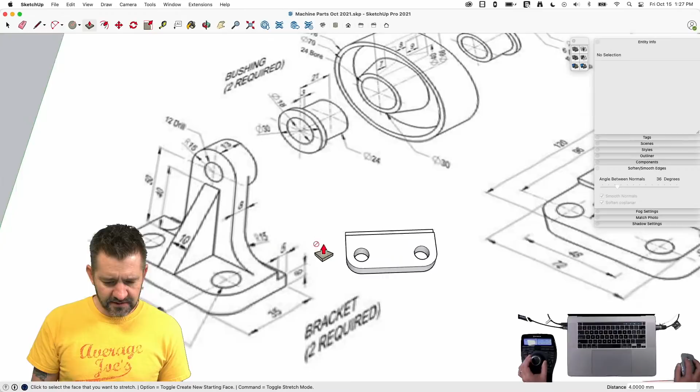All right, so I got my holes in there. What is this width? 8. So I'm going to grab this line, option copied over 8. Now I got to draw this profile here.

So I'm going to go from the center, up 50. I feel like if I take this whole thing and rotate it, does that look closer than... I don't know. Anyhow, trying to cut corners where I probably don't need to right now.

All right, focus. So I have a radius of 15, and this is a hole of 12. I'm going to start with my outer circle. I'm going to come over here.

Why not model the bracket in place on top of the base? Because the base is all the way over on the other side of the shop right now.

Okay, that's a good point, Dave. Let's bring this over here. All right, I'll grab all of that. Move it right on top.

Now I'm going to take a line straight down, line straight down. That's that outside section. Now, so before I kind of drew an arbitrary arc and then used...

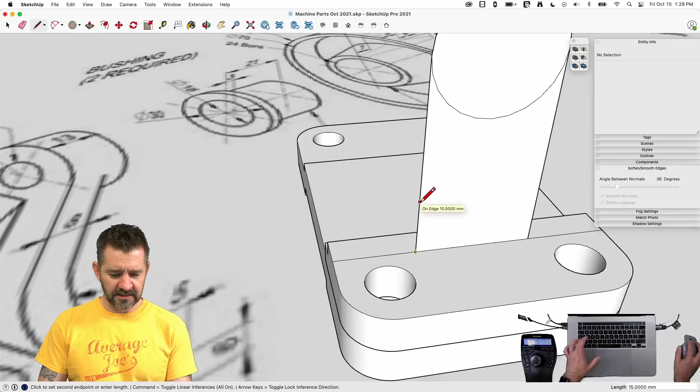All right, doing that, this is not totally unexpected to have happen this way. I can't say why, but when you start doing push-pulls on existing geometry, this can happen. Usually it's not a big deal. If you don't have a lot of interior geometry, it's usually as simple as right-clicking on a correctly oriented face and saying orient faces, to get everything pointing the same way again. Yeah, so it happens.

All right, there we go, there we go, there we go. So now we have a brace right here, and we have a hole in the middle. So I'll start with that hole in the middle. Start here. No chamfers or curves on the brace. That's right. Excellent, just a straightforward triangular brace the way we like them.

I think it's going to be as simple as going here, up 40, back down to the center point here, back to here, and we pull it this way 5, and then pull this one this way 5, and then orient faces again.

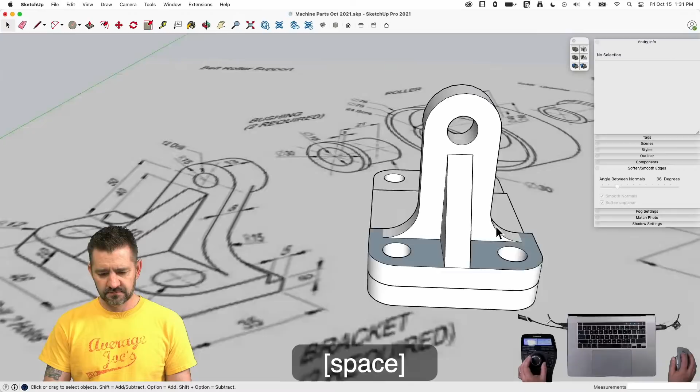Let's see if that ends up working. Oop, oh, hold up, I'll make that a component, bracket, as the plans say. All right, so when I did that, you see it did not come through as a solid component, but just as a component.

I am guessing that probably when I put this piece in here, maybe it didn't get rid of all the geometry on the inside. So obviously I could use Solid Inspector to look at it, but if I don't have Solid Inspector, or don't want it for whatever reason, it's probably an easy enough cleanup. I'm going to double click to come in here and hide the rest of the model.

So I'm isolating my view, only seeing what's inside the selected component. And then I'm going to do the same thing as before: hide this one piece, come peek inside. Sure enough, there's my problem. That geometry shouldn't be there. Delete it, edit, unhide all. And now if we pick on it, now it is solid.

All right, let's do one last thing here. Grab that, rotate it from the center, option copy, and save.

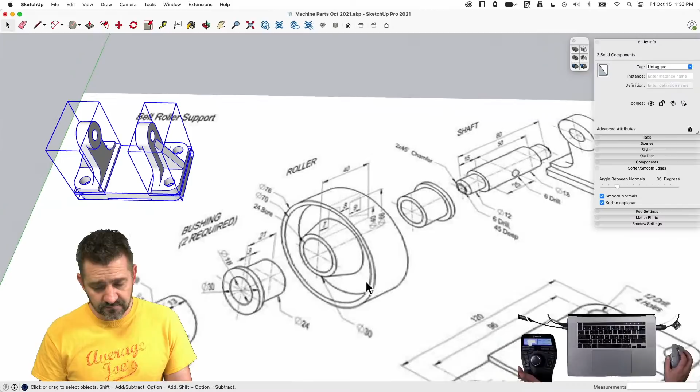Okay, so now we got 3 more pieces to put on here, 3 more pieces to model, 4 more pieces in total. Let's start with the shaft right here. So there's a couple ways we could do all of these pieces.

I feel like doing push-pull is going to be the easiest for the shaft. Maybe we'll do the roller as a follow me. We'll see. So in this case, what I would do - and I say it that way because there's so many ways to do any of these things - I would probably start with a circle that is the outermost dimension.

So that is 18. So I'm going to draw a circle with a 9 radius, and then I'm going to make that 50 long. Now up here, this is going from 18 to 12, so I'm going to offset half that distance, which is half that difference, which is 3. Now I'm going to pull that out 15.

And now I have a 2x45 chamfer, so here's what I'm going to do for that. Dave said to draw the shaft in place between the brackets. Come on with your in-place stuff, I can't see it as well there, it's in the way.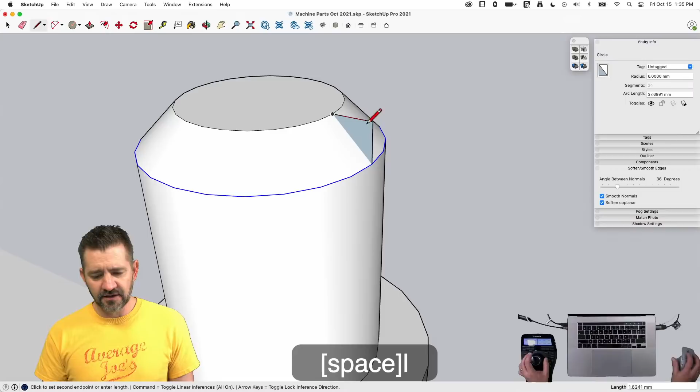I'm going to offset this 2. I'm going to take the outer ring and then move it vertically to give me that 2x2 chamfer. So if I was skeptical and wanted to verify, I could come over and draw that over 2, down 2, and I could actually check and see that that's exactly what it was. The other thing I could do there is a subtractive follow me, where I could go on the inside and draw that same angle and do a follow me all the way around to cut it. But grabbing the ring and just pushing it down if it's the same amount is pretty simple.

Then it has a 6 drill, 45 deep. So we'll go circle, come to the middle, 3, and I'll push that down, 45.

Now we're getting close here. I'm gonna take this and move it off the paper, like it's something. I'm gonna grab all of this. I'm gonna draw a line - actually, I don't need a line.

Watch this, I can just turn on my hidden geometry. And I take all of this and come to the middle point right here.

Now, here's my question, here's the thing I'm not getting from this. So this hole, is that only on one side? Oh, is that like for oiling or something? Because it doesn't look like it's actually on the other side. So is this what this thing looks like? You can't really tell. Is it like that? And then, what would the oil be accomplishing by putting it in the middle of the shaft like that? There's nothing going through it.

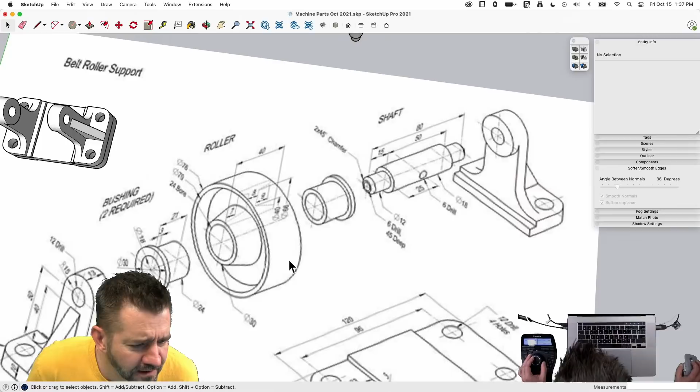Was this a stationary shaft and these spin on? It's the bushings. It's only - Dave said it's only one end - so that's really all I am concerned about.

So I'm gonna grab this. Oh, something didn't quite join up. I know that copying that like that will create some extra geometry on here too, so I might do the same thing where I'd hide this piece. There we go.

Okay, this is almost done, except I need this one last hole. So there's another number 6 hole. The line's going like this, so I'm assuming it goes all the way through, 25 down from the end.

I'm gonna go C. All right, and rather than doing solid tools, I'm doing this one a little bit differently. I'm gonna pull that all the way through like that. I'm gonna select and reverse the face of this tube on the outside - here are these faces so you can see. I'm gonna select these 2 faces and probably this guy right here, and then right click, intersect with selection.

Now I'll delete that, delete that, delete that, delete that, delete that, and delete that. Actually, I probably have a couple more to delete here. All right, there we go. And that's what that looks like - 2 overlapping drilled holes through there.

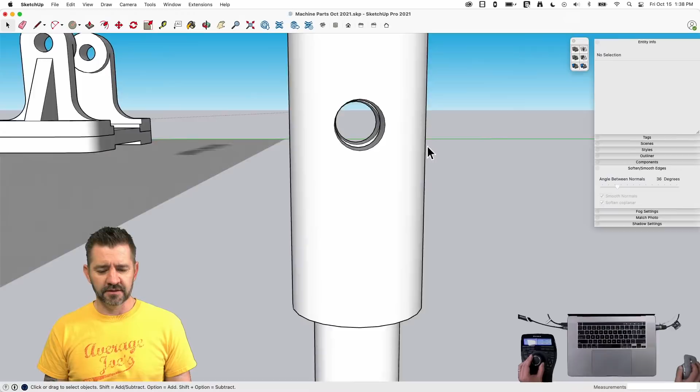I could have done that - I could have actually made the main shaft a component a little bit earlier and then used subtract to do that, but you know, we're here to learn, we're here to experiment. All right, triple click that, make component. Is it actually called the shaft? Yeah, it is. Boom, shafted it - that's not the proper use of that term.

All right, so now I can take that, I think, and grab it by this, and this should line up pretty - oh.

Huh, after 24 the faces don't quite line up. How many are these on this one? I think it's just that you need to rotate it just a skosh.

Your peaks and valleys are perfectly smashed. Yeah, there you go. It's just slightly off there, see that? So let's do this.

Put that there, and then we'll slide it over from, it's too close, I can't figure out where it is. All right, so that is that.

Yeah, that's weird. I kind of wonder if the idea is you put a pin through something and then tighten the screw. I don't know. It's a hole. It's a hole. It's in the drawing. It's a hole. Who cares?

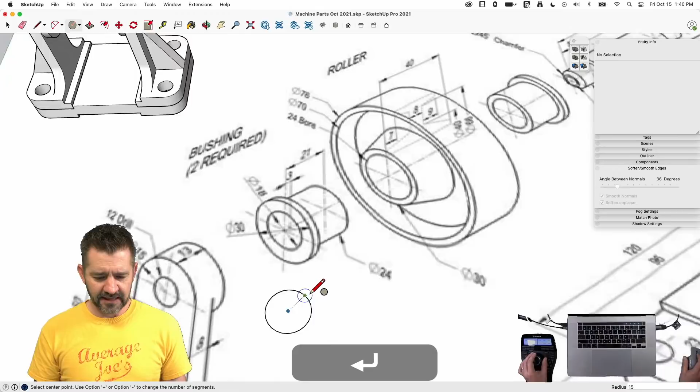Should go ahead and save just in case. Command S.

And then I have a circle inside that, that's 24. So I'm just going to draw one 12. Then push pull that up, 21. And then my inside diameter is 18. So draw another circle right here.

It is 9. And then pull that down to there.

So I think it would have been... you couldn't have done it any faster. Right. Yeah, I don't think it was more or less efficient than doing it that way. Yeah. All right.

Make component. Bushing. All right, this guy's going to go.

Like that, and I'm going to spin him.

Oh yeah, okay, so Bill said it's like a bearing lubrication hole, so if you put a bearing or something in the hole that we can see from the top there, you lubricate it from the end. That makes sense.

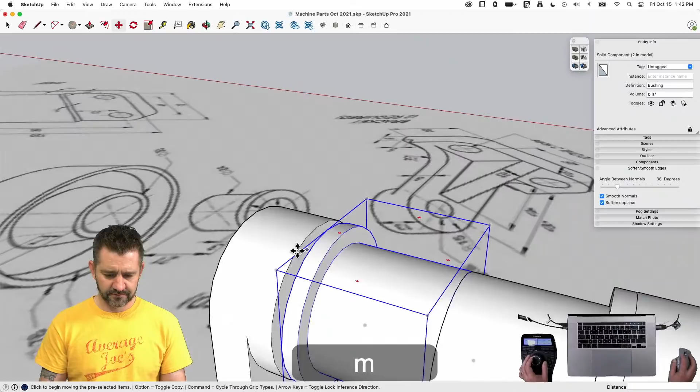All right, all we need now is a wheel. A roller, if you will, which is, of course, the way smart people say wheel.

All right, with this, I think here's how. So I want to do this with Follow Me for no reason, I guess, other than I said I could. So it's not necessarily a good reason to do something, but I'm going to do it. I'm going to try it. All right, that's the American way.

So here's what I would do. I would start probably with this rectangle here. So my overall outside dimension is 76. So if I was to draw a line, 76 by 40.

All right, so that's the profile of my roller. I'm going to cut it in half because I only want to model half of this. So 76, and then here I have 70, so half of that is 3. So I take this option, move that down 3. That gives me my outer ring.

Right here at the center, 24 bore, so that means take this one, move it up 12. And then outside of that is 30, so that's 15, so that moves that up 3.

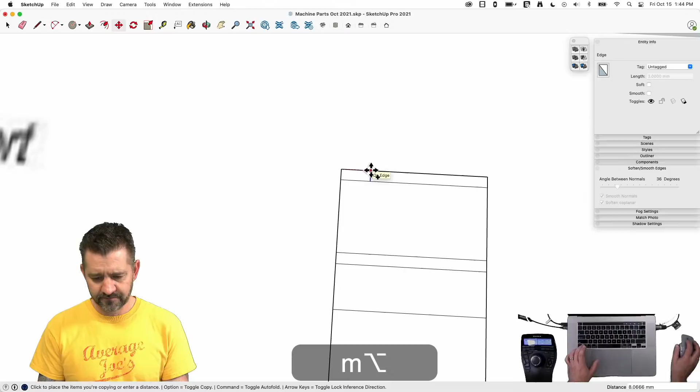So this outer piece right here is actually 7 millimeters. So I'll take this one right here, option move the 7, and then I'll just take that whole rectangle and move it over here. So this is my inner wall, this is my outer wall, and now they do connect back together.

So it's with a piece that's 8. I'm going to draw a line like this, and I can move it this way 4. And this way 8.

Exciting. That doesn't look centered. Try that again. All right, option, read this way 4. Back this way 8.

All right, so this, I'm going to keep this line because that's the center. I don't want to delete that. But this is kind of how that roller works. I do have, there's some tapers in here.

Is that saying it's 7 on one side and 9 on the other? Kind of looks that way, doesn't it? I see 7 and 8 and 9. So this is 7.

7 right here. Sorry, 7. Nope, 9. What the crap? Oh, it's in, that's the dimension in. Okay, yep, we're good. 9. Everything lines up.

Now we've got some angles. So this one, 40 degrees down. If I draw a line like this, I take that line, and I rotate it. That can't be right.

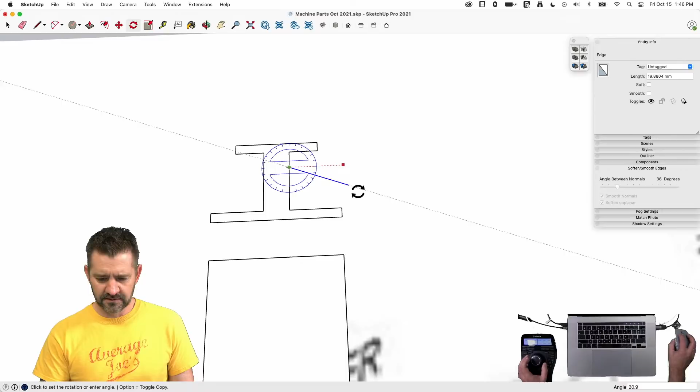Oh, the dimension from the center is half of 40. Okay, so this is 20.

This is for somebody who's turning this, obviously makes sense. So that's this dimension. And then this says 66, so I would come up this way. Wait, no, half of 66. So at the midpoint, there we go. 33.

Going back to, could we have drawn that with just a bunch of circles? I think the issue with drawing with a bunch of circles would be getting those exact dimensions. That would have been difficult. Well, the fact that the instructions are for someone turning it on the lathe, and that's pretty much what Follow Me does, it does make a lot of sense.

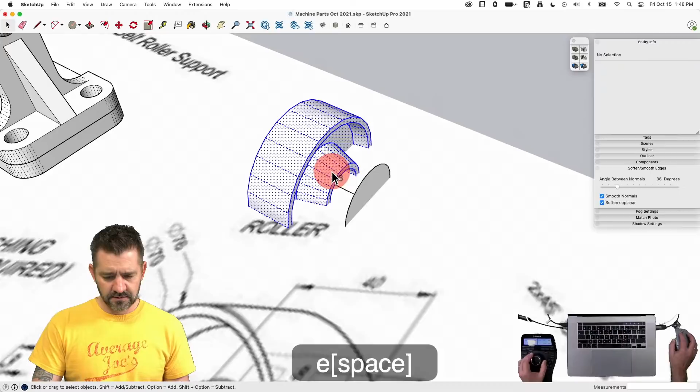Make that into a component. Come on, man. And call that the roller.

All right, grab that by the top, and slap it right here for right now, because I have a snap point there. And then from there I can drag that over to the side. Oh, it's not center. What? Wait, so it floats in the middle, or the bushings, at the bushing way.

Okay, so how far apart are these guys? Two, so scoot them 1 millimeter. Tolerances, it's all about tolerances. Maybe.

See if that does it. Let's slide this guy. Whoa!

Like that? I can see why you wouldn't want your bushing necessarily rubbing up against this, but the gap's odd. I feel like the bushings probably go all the way up to the edge, and then there's a bearing in the middle that helps kind of hold them taut.

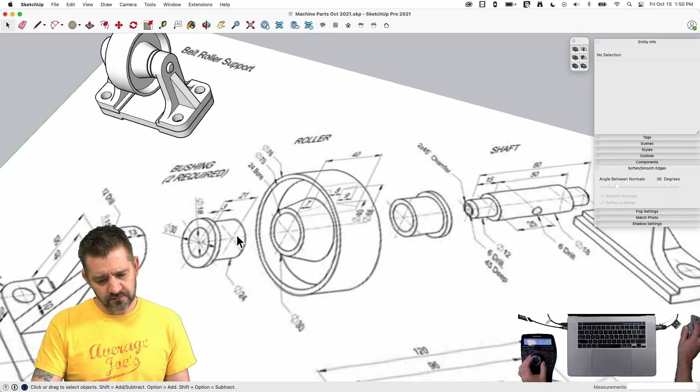You'll notice there is not a fully assembled drawing, so maybe we caught some shenanigans. It's entirely possible. The important thing is we did a thing. But yeah, I mean, it does add up, because look, the overall dimension here is 21 minus 3, so that's 18 and 18, and the outside here is 40, so those two won't touch.

Wait, Dave thinks the bushings are pressed into the roller, and it'll have a little room. Yeah, so that's the way. Wait a minute, hold on one second.

Who's quality control on this? I did this wrong. I drew this 21, but the overall is 21, so this piece has to push back 3.

Which makes a lot of sense, because check this out for a second here. Hear me out, that's right. So if I push that all the way in, which I buy that, I buy that. Now if I hide this, look what this does - look at that little space for the lubrication to get right in between there and lubricate whatever mechanical thing is happening. Exactly.

Boom, so it does, yeah, floats a little bit here, which makes me think that maybe something's off there, but that would mean both the shaft and the base were incorrect. So I'm having a hard time with 2 millimeters on either side, because this is, yeah, this is 40.

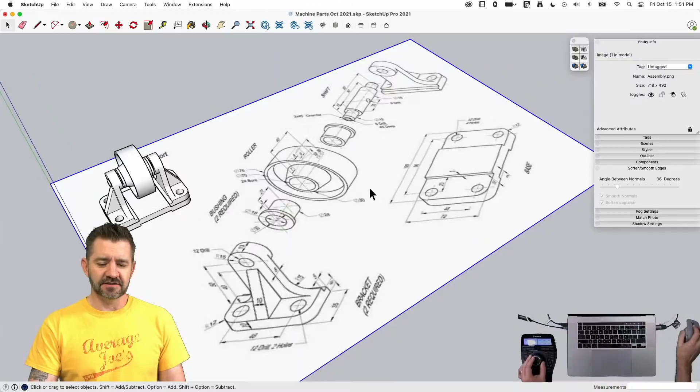Yeah, so they said there's a fully assembled image on the web too, so I think he's checked it and he's saying it's right. It's funny because this thing, there's probably a good 24 different drawings of this, so I think this is something machinists practice building. Yeah, this is a commonly modeled or commonly built thing, this roller pulley belt roller support - this plan was done over and over again that I found.

But hey, that was number 5 of 5. Look how little it is compared - I figured since those pieces going together it'd be bigger, but apparently you can put small pieces together. So things happen.

But that's pretty cool, that turned out pretty neat. I like it.

I'm prepping for the thumbnail. Oh, you know what I should do? I should do what Tyson does - Tyson always does, he has the nicest looking thumbnails. Let's get a shadow turned on here. He does that a lot. A little extreme, maybe we'll bring it back a little bit. Oh yeah, that's nice. That's good. Square it up a little bit. I think that's gonna work.

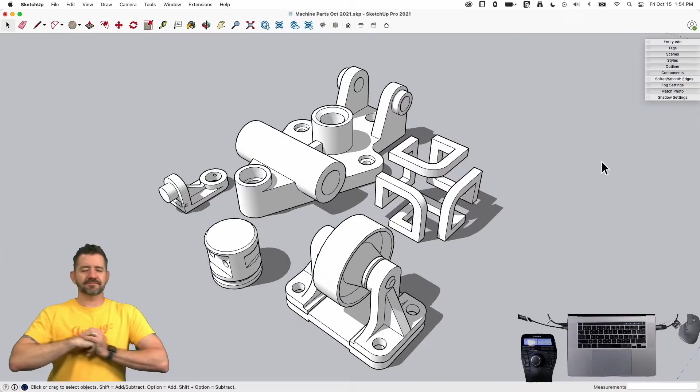So there we go, that is 4 machine parts and 1 assembly made of multiple machine parts. A fun way to practice. If you're watching this later and just came across this, this isn't necessarily the primary function of SketchUp. SketchUp's not necessarily perfect for creating machine parts you send to CNC or something like that. It does create segmented circles and line pieces. Everything's accurate, but it loses it in the arcs a little bit as far as accuracy.

The real reason you would want to do this kind of work is to practice. So if you are newer to SketchUp or newer to 3D modeling, Googling machine part drawing will bring up tons of work that you can practice with. It's just a great way to get good and quick at modeling. You can model houses and that kind of stuff off of plans, that's great. But this is a way to sit down for like half an hour, lunchtime, something like that, and get some good SketchUp practice under your belt.

That was actually 2 hours. Okay, do one of these at lunchtime. Yeah, not this many. I mean, hey, if you can do this many pieces an hour, you're probably doing pretty good.